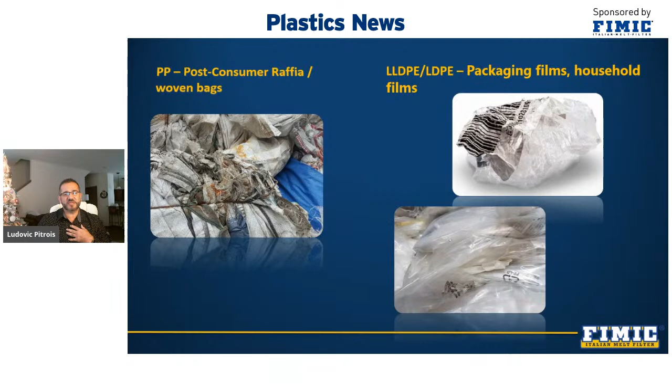Examples of plastic that are separated for recycling include those in these images: post-consumer PP, raffia, big bags, and linear low-density polyethylene, LLDPE packaging film, or low density of post-industrial origin, although the latter do not come from garbage. Either way, they contain some contaminants such as labels, ink, paper, and more. Depending on the region, state, and even the country, the amount and type of contaminants may vary. If you want to consult any material, we are available in the chat room to respond to each of them.

In the first two images, we see regrinds, either unwashed or washed. In this case, it is HDPE, mainly milk jugs or cleaning product bottles. Once pelletized, these plastics are reused in new products such as cleaning product bottles, automotive oil containers, pipe, pallets. Bottle caps, for example, which are usually made of PP, are reused to produce new caps, containers of all kinds, car accumulators, and more.

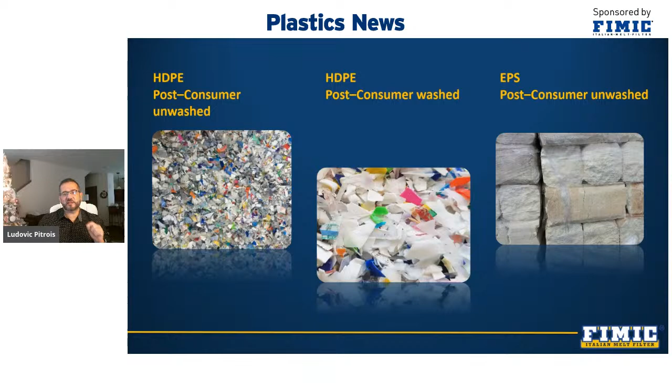The other image corresponds to expanded polystyrene in compacted blocks to lower transfer cost and comes mainly from fish boxes, construction material, or packaging in general. It can be reused to produce pots, residential or industrial thermal insulation, office accessories, and more. This type of material is very special, and many recyclers are expressing interest in recycling it today.

So, how are the materials described in this picture processed? Once separated, these materials go into the pelletizing process that starts with feeding the extruder, designed according to the type and shape of the plastic. It can also include a cutting process and agglomerate in case of very light plastics.

The design of the screw and barrel can also change according to the type of material and its contaminants. Hence, it can include one or more degassing zones depending on the ink content, or even a tandem or cascade system using a second extruder and its filtering system, including, of course, a pelletizer at the end of the line.

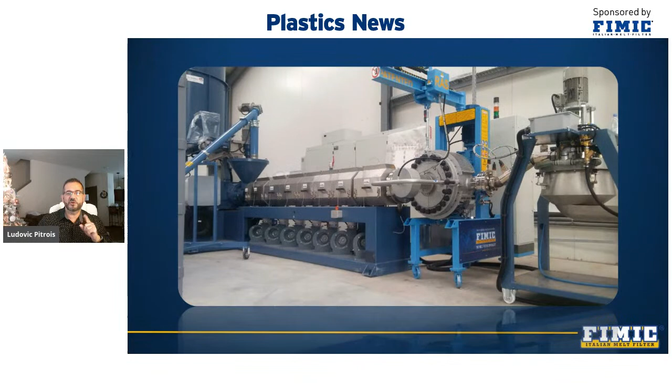Today, the filtering system has become an essential part of the pelletizing line, and to prevent it from becoming the bottleneck of the line, we must select the ideal filter for your processes. This being said, though, when we process highly contaminated plastic, we need an automatic, self-cleaning filter to avoid constant screen changes. On average, with our self-cleaning system, you change screen once a week, increasing productivity in your pelletizing line

and processing washed or unwashed plastics, which facilitates the purchase of material that you previously could not process or with more contaminants at a lower cost. I have seen many cases where screens are changed every 3 to 5 minutes with traditional filters, causing frequent machine downtimes, significantly reducing line productivity, generating more input and labor cost by requiring a fixed operator just to change the meshes, screens.

Nevertheless, I really want to clarify that all filtering systems are efficient if used for the process they were designed for. Hence, the importance of selecting the right filter for your process, which will suit your actual production capacity and material type.

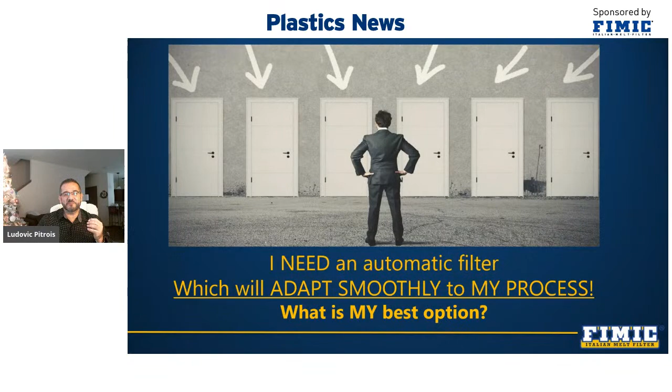So, how do we choose a filter? A filter must be chosen based on your needs. Ability to process any type of plastic waste. Ability to resist and eliminate aggressive contaminants such as metals. Ability to control the discharge rate and therefore reduce melt losses.

Ability to choose the right screen according to the final product with no productivity reduction. Ability to adapt the filter to any extruder, new or existing. Ability to increase pelletizing lines productivity.

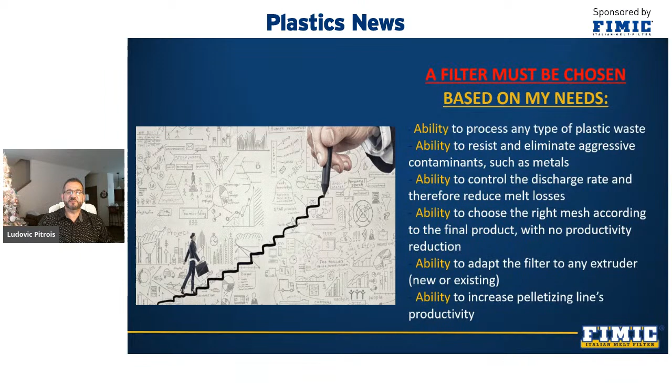These are different forms and types of plastic: post-industrial and post-consumer, washed and unwashed, like different varieties of PE, PP, ABS, PS, and more. Just imagine the different materials you might be able to process with the right filter, which today you probably cannot process or have some issues doing it.

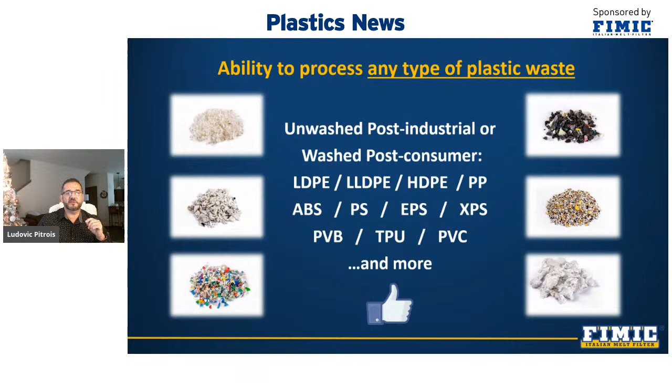Here, we see different discharge of contaminants depending on the type of contamination: paper, wood, organic, metal, unmelted plastics. In the case of recycling, you will not always know the type of contaminants that can be found in the material you purchased. Therefore, a suitable and flexible extrusion line is required, as well as a versatile filter with economical spare parts consumption and spare parts price.

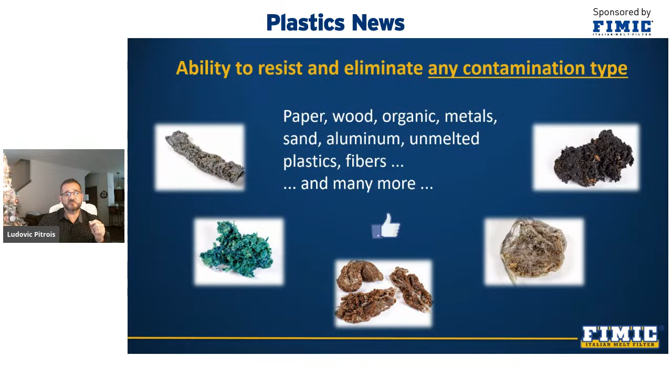Then, going into more details of the example before us, we will observe images of the different stages of plastic during its recycling process. First, the ground PE as it enters the extruder. In the center, we see the discharge after the self-cleaning action of the filter with contamination such as labels, aluminum, wood, and metal. On the right, we see the plastic outlet already in pellet form.

In this example of unwashed polyethylene film from packaging, we use a laser quality screen with perforation of 200 micron, an equivalent of 75 mesh in woven meshes. These pellets are reused among others to make blown film of 20 micron thick, such as garbage bags. The average of our discharge consists of 99% contaminants and only 1% useful plastic. So our discharge is among the lowest between the different filtration systems.

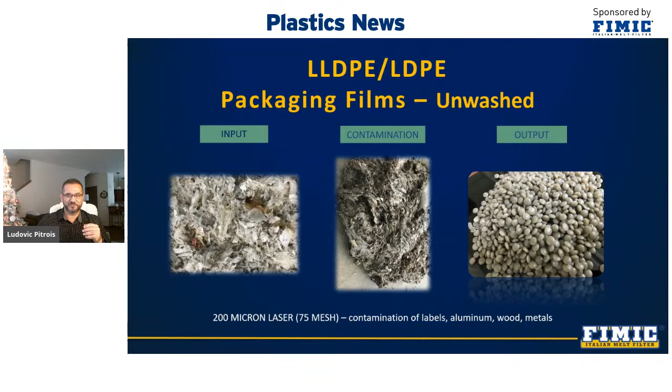Here, we see post-industrial polyethylene with the same screen and contaminants. In addition, we can clearly see paper and adhesive tapes. The final color of the pellet changes according to the type of plastic and its contaminants, but color is also affected when the temperature and pressure are higher than normal in the filter area.

Our filter has the largest filtering area or surface on the market, with only one screen, allowing better temperature and pressure control in the filtering area, avoiding material and odor degradation, and color change.

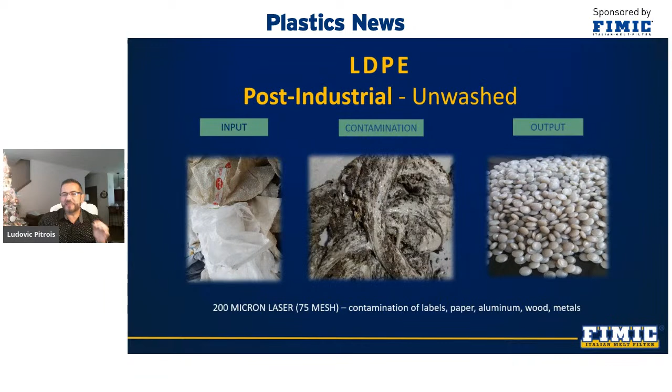So we see post-industrial polyethylene and the same screen and contaminants. We continue with polyethylene, but a type of material that at the extrusion level is easier to process because it's heavier in density. However, at the filtration level, it is more complicated by its fluidity index, MFI, which is very often stiffer. We talk about high-density polyethylene, which can logically be of various types.

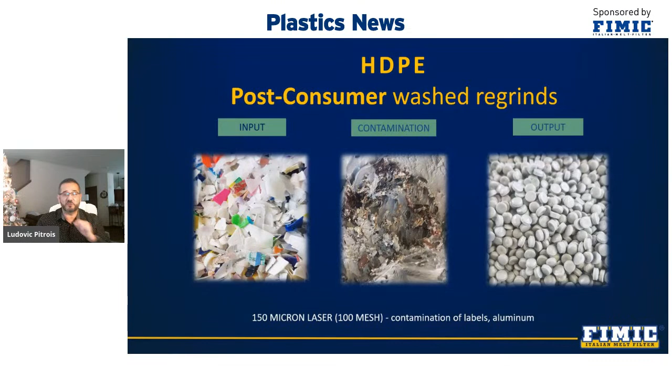Here, we see the washed post-consumer bottles. We reduce the perforation of the laser screen to 150 micron, equivalent to 100 mesh, to be able to remove label and aluminum efficiently, always maintaining a very low pressure level and then not allowing soft contamination such as elastomer or rubber to pass the filter screen because of high pressure. These pellets are reused in piping, new bottles for cleaning products, and very recently, thanks to technology in the market that takes the smell out of the pellets, also for cosmetics.

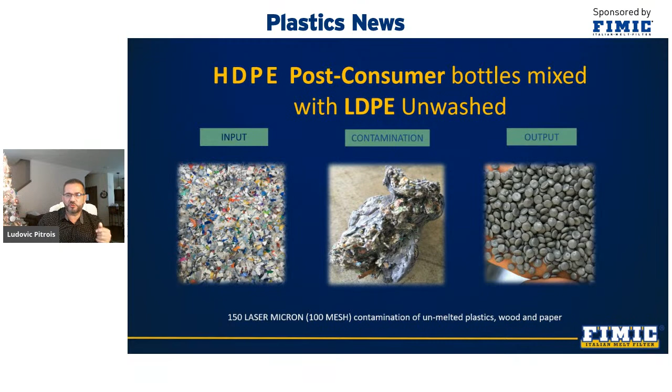Here, we see a mixture of high and low density PE filtering at 150 micron, laser screen, and a discharge of contaminant containing wood, paper, and unmelted plastic. Other example of circular economy and material that could be recycled.

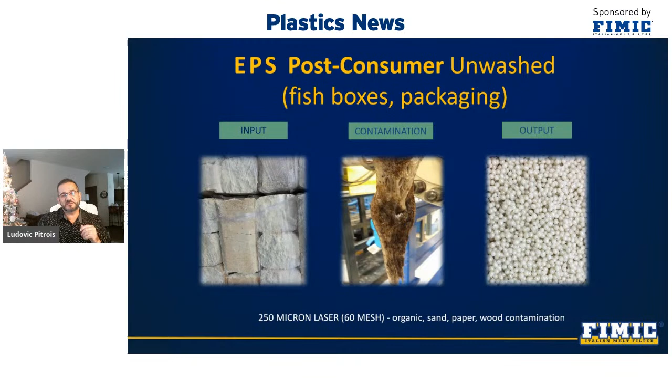This image corresponds to the expanded post-consumer polystyrene filtered with a screen of 250 micron, equivalent to 60 mesh. This material is very special and difficult. Very often, it cannot be washed because of its very light and its electrostatic nature. Then, contamination level can be very important. A finer filtration can also be applied to produce micropellets in case the application requires it.

Still, XPS, also called post-consumer or post-industrial unwashed insulation expanded polystyrene. Our customers filter this material with a mechanical perforated screen, non-laser, so-called punched, from 400 to 500 micron, equivalent to 35 to 40 mesh, to produce insulation panel again.

Another advantage of our filter is that we can select between laser screen and punch screen to lower cost when we do not need fine filtration. Depending on the material, contamination, and final application, you can choose the necessary and appropriate filtration to have the necessary quality, and paying only what is necessary as far as spare parts are concerned, and purging of the discharge material based on the contamination amount.

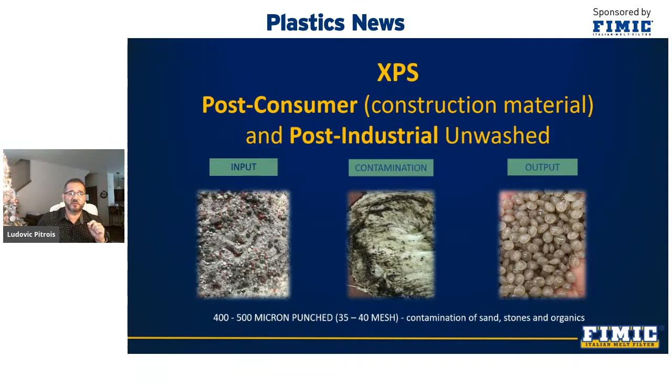Here, we see polypropylene from big bags fabric, raffia, packaging material from polypropylene woven tapes, with the use of a laser screen of 200 micron, equivalent to 75 mesh. Contamination of aluminum, wood, and PET fibers. Here it is possible to filter PET as its melting point is at approximately 260 degrees centigrade. Hence, the importance of good temperature control in the filtering area, that is possible only if the pressure stays at a low level.

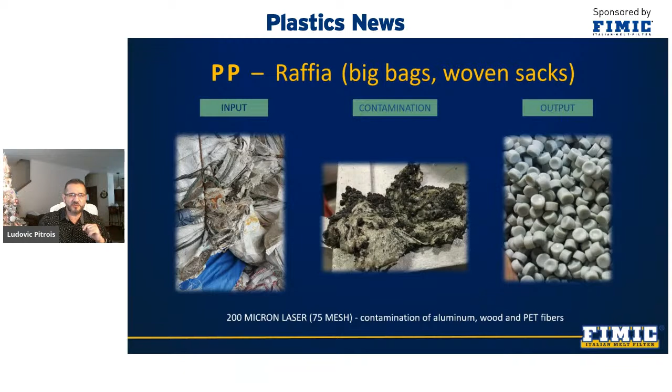We have many customers asking us to recycle this type of material, but it will only be possible with a good filtration process, but also an excellent crushing and washing system. In Colombia and Kenya, we have customers who only recycle this type of material to reproduce PP tapes again, with a percentage of recycled material sometimes as high as 50 to 70%, and applied filtration of 120 micron, 120 mesh, or even 100 micron, 140 mesh.

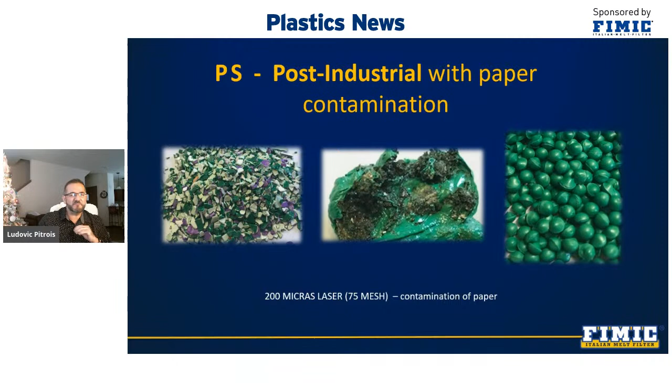This image corresponds to the PS regrinds, treated on the 200 micron screen, with paper as the main contaminant. Once recycled, PS pellets can be reused for the manufacture of appliances, clothing hangers, and more. In recent years, PS and ABS from e-waste, which were previously shipped to China, have become more important, while now they must be recycled locally. Today, we have many installations for this application with excellent results.

Obviously, now it is worth mentioning some cases of less frequent materials in recycling, such as PVC or PET, mostly used for applications that require strong binding. In both cases, though, we have also installed filters that successfully recycle those materials. In fact, I would like to proudly announce that FIMIC successfully installed in 2019 the first filter to treat PVC waste, both flexible and rigid.

Since then, we have seen a lot of interest from recycled PVC companies for our FIMIC filter, as it is the only solution to filter this type of very sensitive material continuously and not manually. Our system will check the ease and speed with which the material flows within our filter, which presents no dead spot nor any corner where the material can reside and therefore degrade, which we know in PVC is often a real issue.

In the case of PET, the material is known to be very clean compared to post-consumer or post-industrial. So for PET, many customers use manual filters or backflush filters. Since we talk about percentage of contamination in parts per million, there should be no need for a self-cleaning automatic filter to process it.

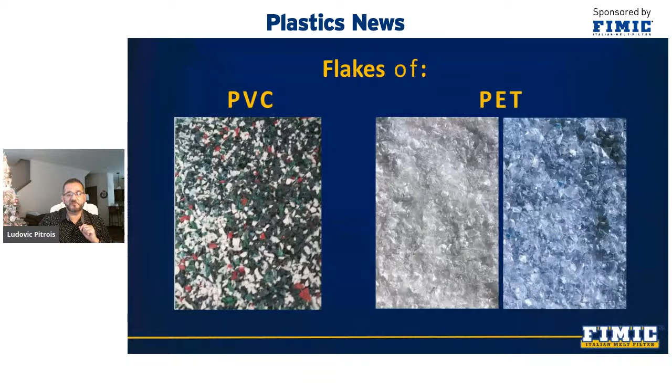There are other alternatives. For this reason, we can say that in the case of post-consumer and post-industrial polyethylene, the return on investment of an automatic filter is much faster. In any case, as we like to give real answers, we're planning to start up the first FIMIC filter for PET recycling within a few months from now.

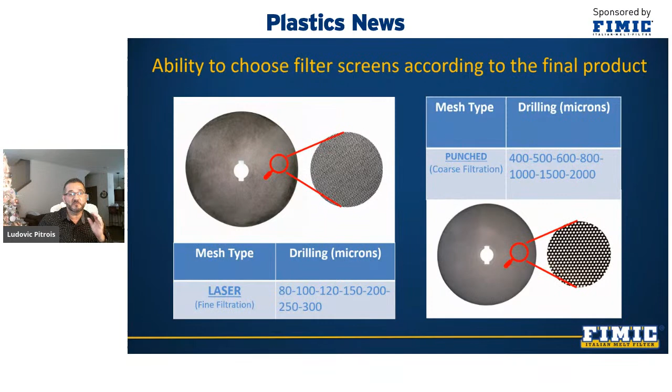Returning to the point of capabilities that our filter should have, we continue with the ability and flexibility to choose the type and size of screen according to the properties that your final product should have. It can be a laser drilled screen for fine filtration with perforation in the range of 80 to 300 microns, or a mechanically drilled screen for coarse filtration with drilling from 400 to 2000 microns.

In any case, we can choose between increasing the size of the perforation in our laser screen to get the same level of the previous filter with the woven mesh, or we can preserve its actual size, in this case of 200 micron, and achieve a significant increase in quality of the final product, thanks to the much more defined precision of the laser screen during filtration.

Another point to evaluate is the high pressure of molten plastic when using woven meshes. The opening of the mesh will let more contaminants pass through the fabric. And if you decide to clean a used woven mesh with open flame instead of replacing it, it will accentuate the opening between the fabric, decrease the final quality of the material and reduce its sales value.

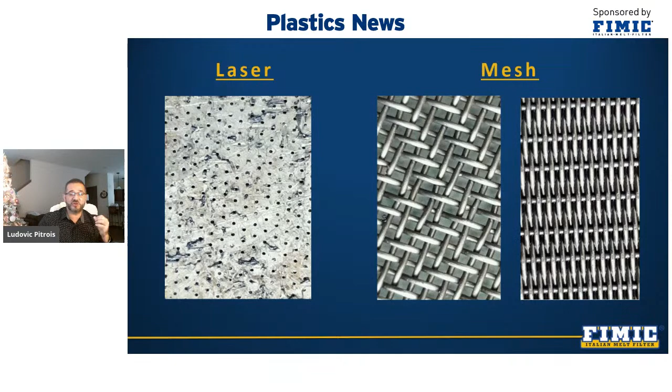I will be delighted to discuss all of the costs and gain details with you if you're interested. It is our commitment to help you evaluate how to lower production costs, improve quality, acquire cheaper material that other recyclers reject, add more production to your extruder and make better, more efficient use of your operators.

Advantages? Well, fast passage of molten mass, less residence time. This is only possible because we use a laser screen and it is 1 millimeter thick, so the resistance to the passage of the plastic is minimal. And of course, the structure of the filter's body, which is smoothly conveying the melt through. Extremely low operating cost. We only use 1 screen and 2 extremely economical blades.

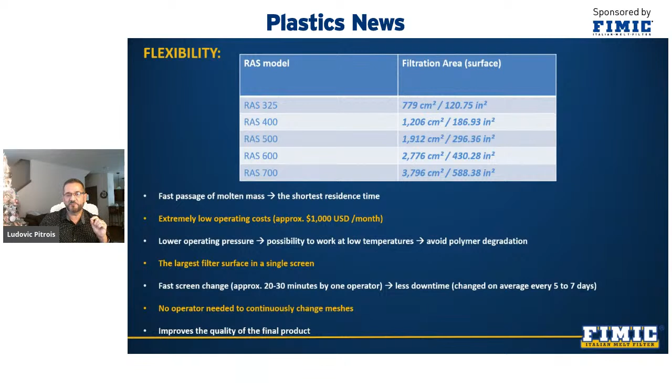Lower operating pressure, possibility to work at low temperature, avoiding polymer degradation. The largest filter surface in a single screen, just like I already mentioned. Fast screen change, between 20 to 30 minutes by only 1 operator. Less downtime, change on average every 5 to 7 days. No operator needed to continuously change screens, and improved quality of the final product. So now I'm going to show you a little animation which explains the functionality of our filter.

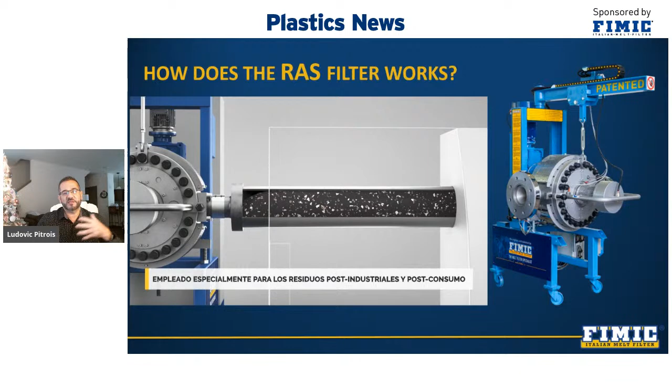As you can see, the material comes from the extruder on the right hand side, and it enters sideways on the filter and will fill up the chamber. It will only pass through the screen when the chamber is full.

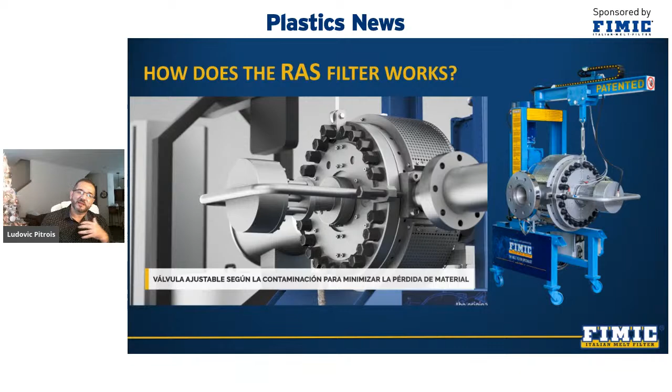As you can see here, we have the scraper, which actually will keep all the contaminants inside the chamber, and then we will just purge the bad contaminants out of the screen.

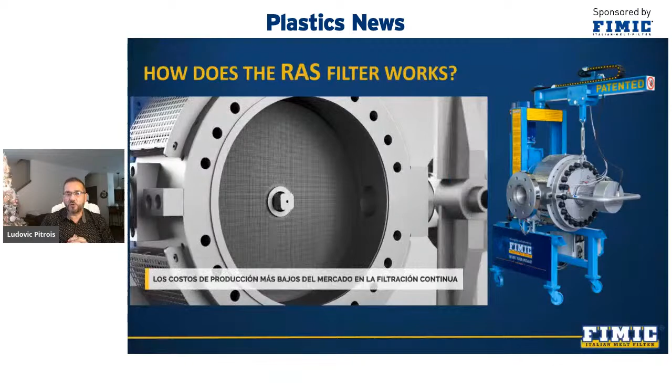As you can see, this is a very simple screen with only a few parts. Again, only one screen in all our filters. One scraper, two blades.

So for your information, we can tailor our filter to any extruder, new, existing, or used. That allows us to replace your current filter with ours in just 4 hours of work, because the filter will be built specifically for your line with flanges, specifically customized to your need.

Using only one screen with 5 available diameters allows us to evaluate what is the ideal filter size for your line, considering material, fluidity index (FI), filtration level, capacity of your extruder, and contamination.

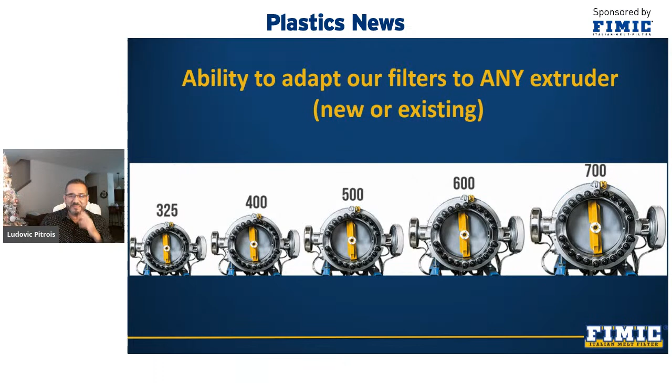It naturally generates great peace of mind for our customers that FIMIC includes with our filter the input flange to the extruder and output flange to the pelletizer, as well as the custom design of our electric circuit according to their requirements, including electrical safety connection with the extruder. Our operation software is really simple and intuitive, thus making it possible for every operator to use it.

When we talk about the ability to increase the production of the pelletizing line, it is because a lot of pelletizing lines have their bottleneck precisely in the filter. Our self-cleaning automatic filter will help release the actual capacity of your pelletizing line, thanks to its extensive active filtration surface. Normally, our customers talk about a 10 to 20% increase in throughput compared to the previous filter they had installed. Naturally, only if the extruder can produce it.

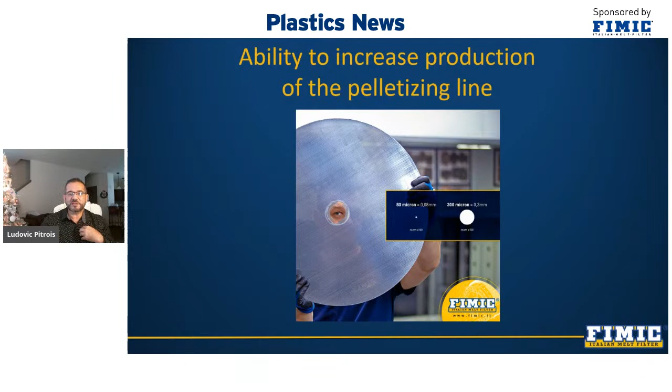It could be that your current extruder had been guaranteed for some capacity and cannot reach maximum productivity because it has the bottleneck in the filter. So please contact us to jointly evaluate if you can do anything to increase your production capacity.

Next, I would like to share the experience of some of our customers in different recycling applications with a wide range of extruder sizes and brands. Many extruder manufacturers recommend our filters as the best option in case of recycling of post-consumer plastic. And with them, obviously, we have a very strong collaboration. As with the rest of the manufacturers, professional respect has allowed us to always achieve success in the end, because we all seek the maximum possible results for our customer.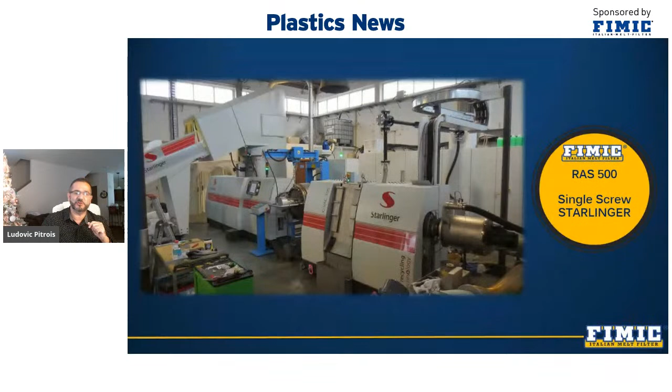In this image, we see a Starlinger extruder processing unwashed post-industrial PP raffia with a capacity of 880 pounds per hour by means of a RAS 500 filter. In this case of Prealpina, the extruder processes washed post-consumer LDPE at a rate of 2,640 pounds per hour with a RAS 600 filter. This is a 600 millimeter diameter screen.

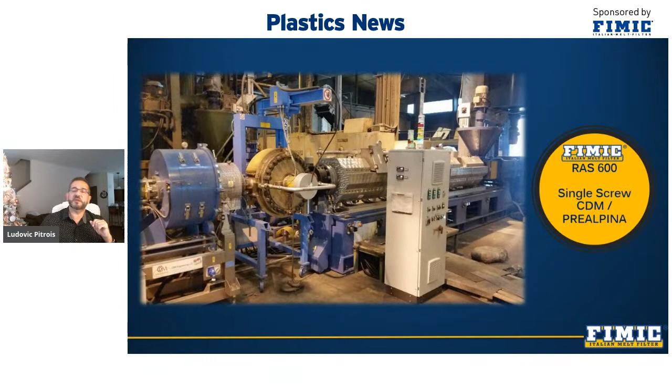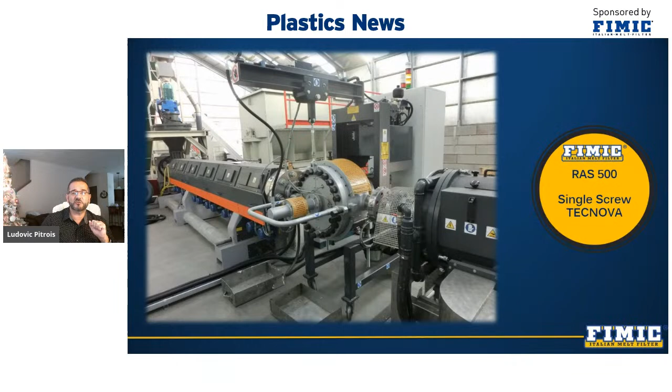In the Tecnova extruder, unwashed PP flake is processed at a capacity of 3,300 pounds per hour with a RAS 500 filter. This capacity is achieved because the customer uses a filtration of 500 micron with a perforated punch screen. In this Davis-Standard extruder, they obtain 4,000 pounds per hour in unwashed low-density PE with a RAS 600 filter. Most of our installations in North America are on DS extruders.

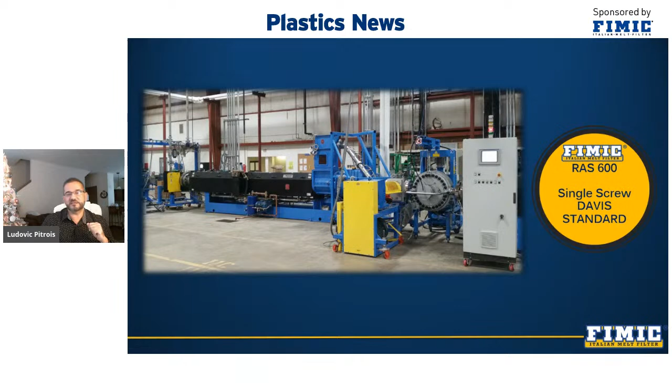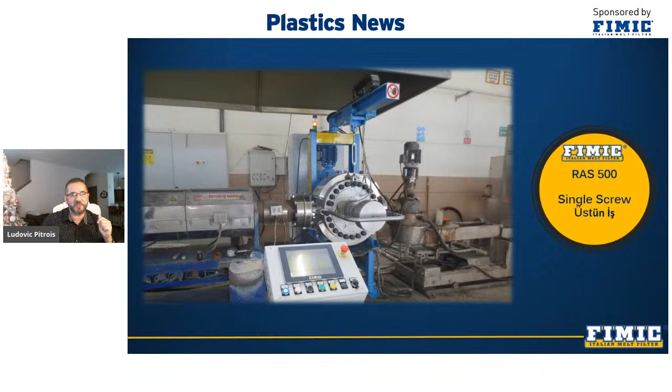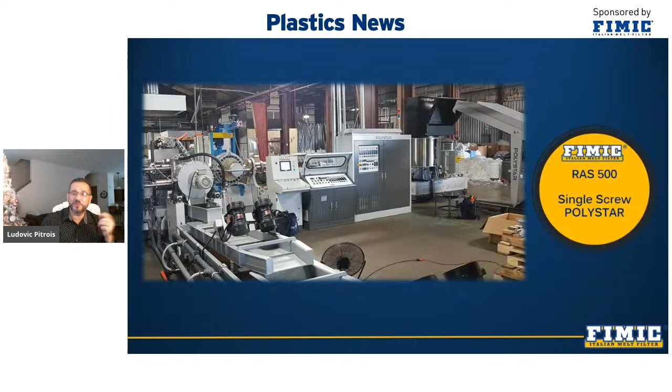A Vicotech line processing unwashed low-density PE packaging film at a capacity of 1,320 pounds per hour with a RAS 400 filter. In this Üstün İş of Turkey, unwashed low-density PE is processed at a capacity of 1,870 pounds per hour through a RAS 500 filter. This Polystar extruder processes unwashed LDPE packaging film as well as PP raffia bags at a rate of 1,980 pounds per hour with a RAS 500 filter.

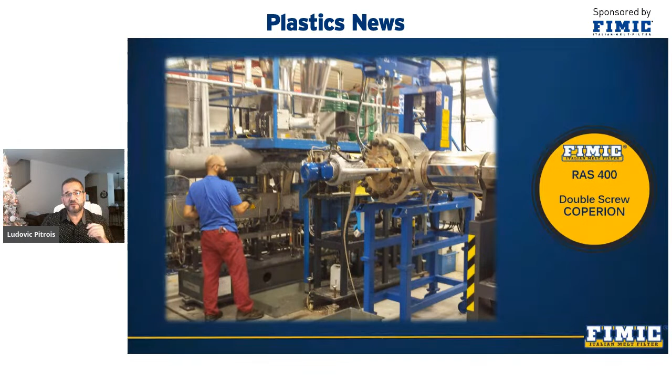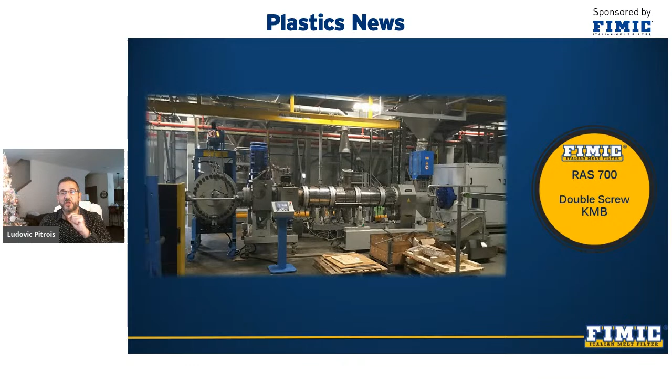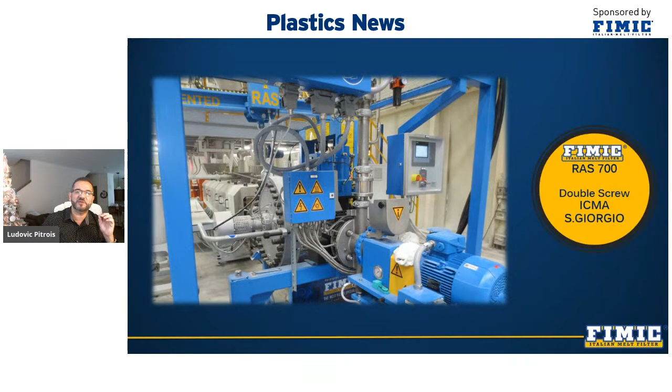KraussMaffei Berstorff twin screws extruder to process washed HDPE at a capacity of 6,160 pounds per hour in RAS filter with a mesh 700 millimeter in diameter and filtration down to 150 micron. Pretty impressive. ICMA San Giorgio twin screw for PP with capacity of 4,400 pounds per hour with RAS 700 filter and 200 micron screen. And finally, this is a Binova twin screw extruder for PP with capacity of 3,300 pounds per hour with a RAS 600 filter and 300 micron screen.

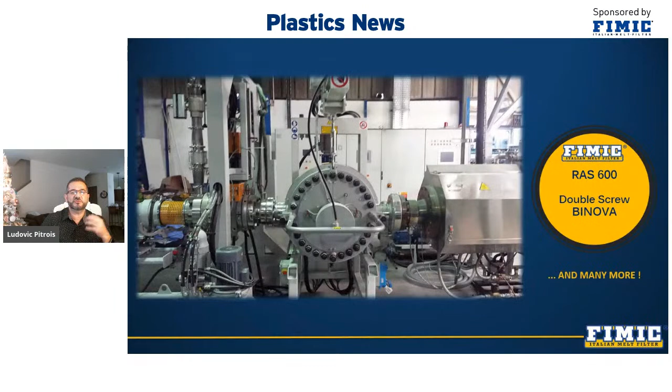Unfortunately, we could not show you all pictures of our successful installations due to confidentiality with our customers. But as I mentioned earlier, we adapt our filters to all types of lines and brands. We want to share with you our experience in post-consumer plastic filtration, so we are at your disposal for any query about your process. As you probably already know, we also have a pelletizing line in our plant in Italy for testing. Do not hesitate to contact me should you have any needs for a material trial.

In this webinar live stream, I talk about our best-selling filter being the RAS type, but we also have other models for other specific applications. We have the RAS plus REF for applications requiring a back flushing system. We have the ERA, a double filtration within the same equipment for highly contaminated and very aggressive contamination. We have the GEM with the largest filtering area for very high throughputs. And last, we have the TEN for low contamination applications with roll mesh.

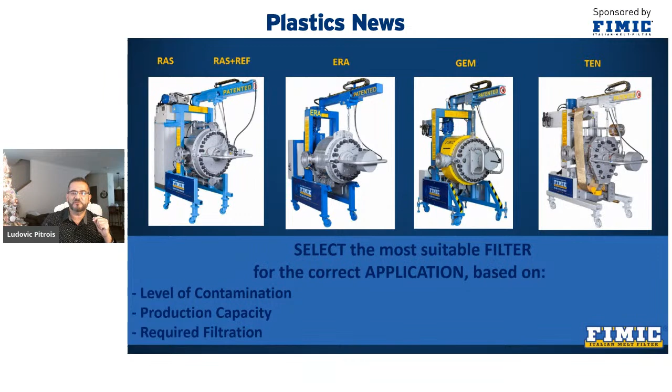Finally, I have the great pleasure to show you the newest shop that FIMIC built this year to increase our production and productivity. By 2021, we need to grow along with the percentage of recycled plastic material worldwide. Finally, today, the world has understood the importance of plastic in our lives. But this being said, it is unequivocally necessary to recycle in order to prevent it from ending up in our trash, landfills, and/or our oceans. We need to create a cleaner world for future generations.

Last but not least, I am very proud to announce that FIMIC won this year, 2020, the award for the best continuous melt filtration technology.